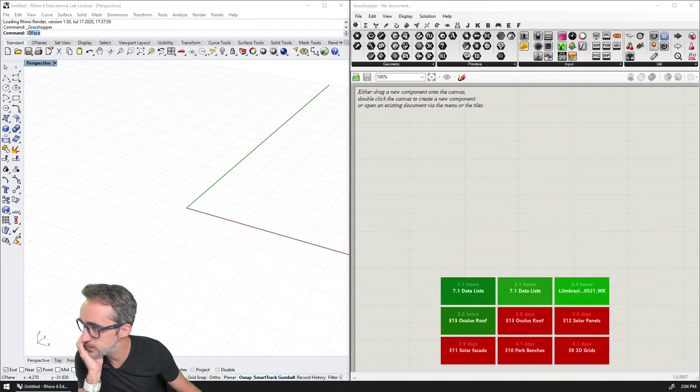Okay Nylan, yes, thank you sir. So what are we going to do? We're going to do 3 exercises. We're going to do a Vierendeel - that's correct, right? Okay, so we are going to... there you go, Vierendeel beam.

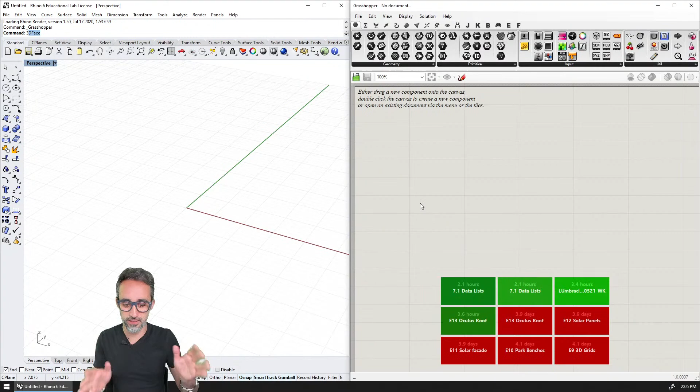And the way we are going to do that - images, tools, usage rights, Creative Commons. Vierendeel, Vierendeel truss.

All right, so we're going to do the following. We are going to - sorry, you should not be seeing this - we're going to do a Vierendeel truss. We're going to do a Pratt truss, right? No? A Pratt truss.

We're going to do something like that, and we're going to do images, tools, usage rights. We're going to do a Pratt truss, something like that. For example, yes, we're going to do one of these, and then what else are we going to do?

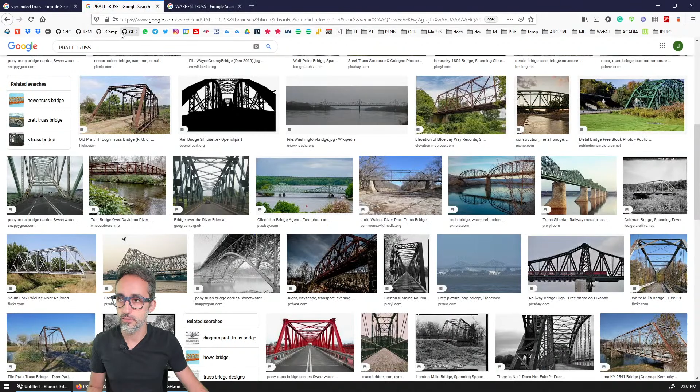All right, so Pratt and Vierendeel. These are going to be very useful exercises because they involve data manipulation and having a set of lists, a set of points, moving them around, removing some, adding others. So it's actually a pretty good exercise.

And then after that we're going to do a Warren truss, and then after that some kind of triangulated facade, and then a triangulated surface - that's going to be quite something actually. So those are going to be the list exercises.

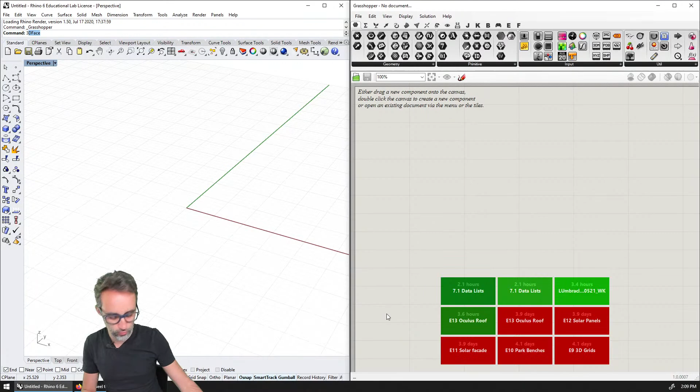Okay, so let's start. We're going to do a Vierendeel truss. So how am I going to start? I will start with the introduction, which I'll record by the end. Then that's going to be me showing 2 points and how the Vierendeel truss goes between them.

I'm not going to explain there, but I'll explain here when I start with the sketches, and how we want to do that - the fact that instead of calculating a long line, we're going to use small segments. So we're going to imagine we are structural engineers and that the model we're generating is for some kind of structural analysis software. That's going to be important to do.

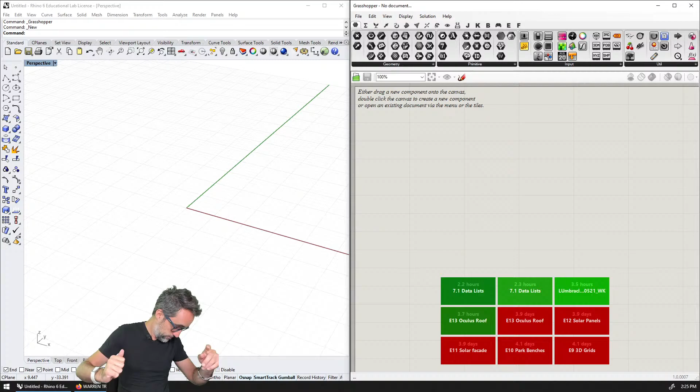Actually, if you allow me, I'm going to take a 30-second bio break, because I've been sitting here since 9 a.m., so I need to go to the restroom. I'll be right back, thank you. Hold on one minute, huh?

All right, I'm back. Rolando, analytical models. Yes, exactly. Okie dokie. So let's get started.

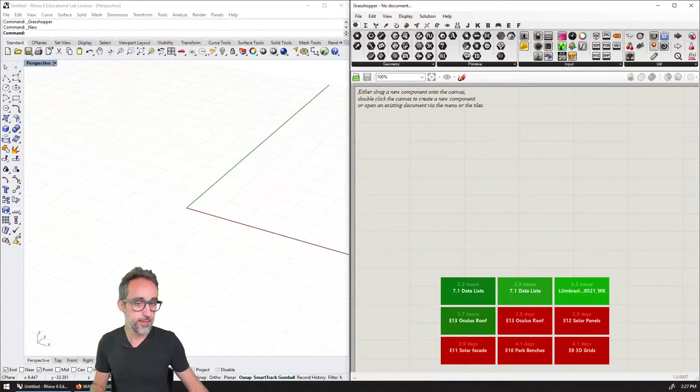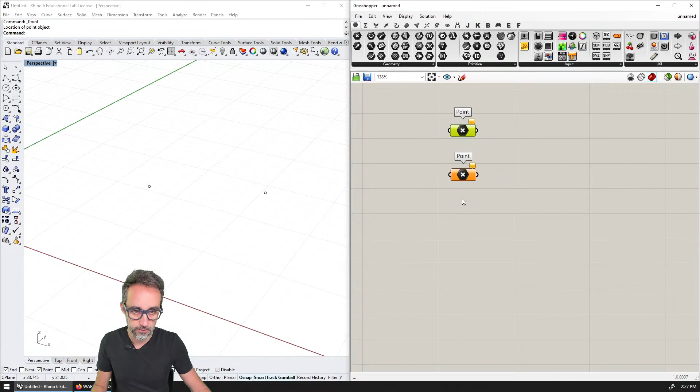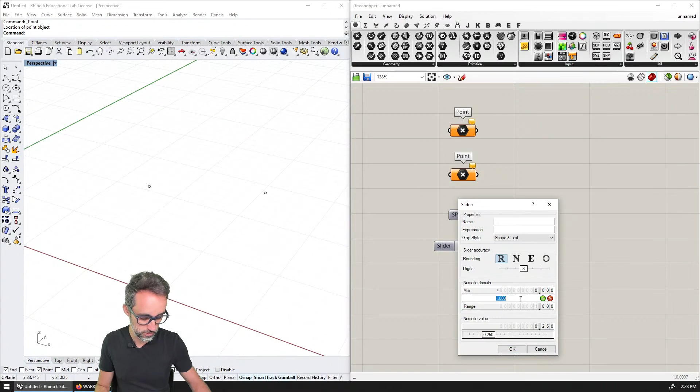Okay, so I'm going to copy and paste this too. And then I'm going to say the length. And number of spans is going to be number of spans. And then this number slider is going to be the factor. So that's going to be, for example, 20. And we're going to set it at 12. And we probably don't need that many. Depth factor. Okay. So there's going to be a long slider, and yes. So that's going to be it. And I'm going to copy this.

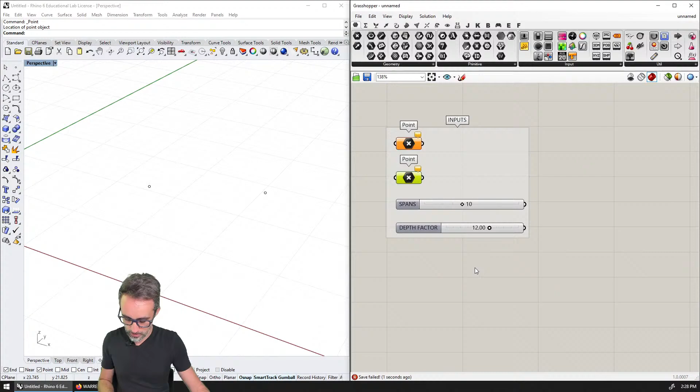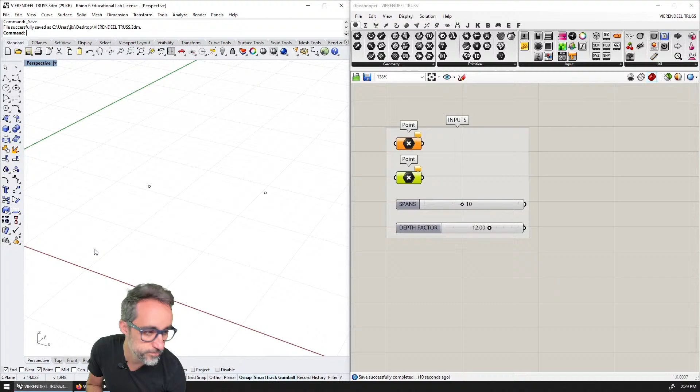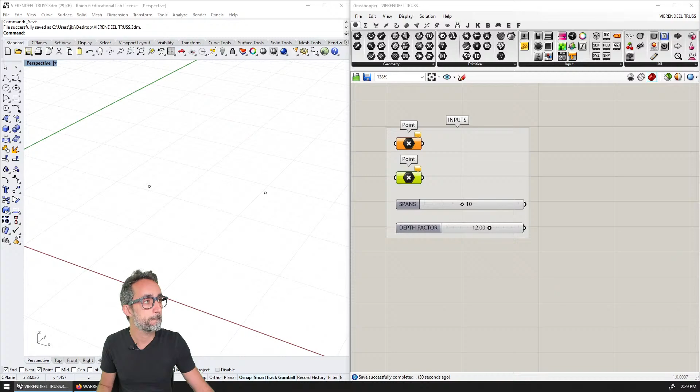Inputs. Okay, so I think we can probably start. And then, what am I going to save this as? Vierendeel. Oh my god, I am super clumsy today. Vierendeel truss, and then here I'm also going to save this as Vierendeel truss. Okay. All right. And what else do I need to do? I think we should be good with this, right? Okay, so let's start then.

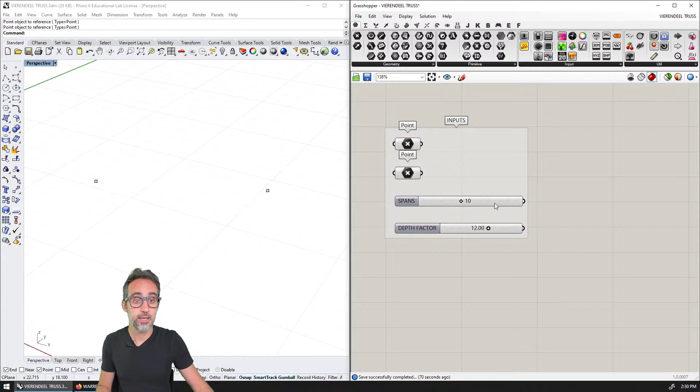So I've taken the liberty of creating 2 points here in Rhino that I will use as supports for my truss. And then I have created some empty boxes here that I'm going to load with 1 point here, and another point here. And then I have 2 sliders. One is an integer for the number of spans for the truss. And another one is going to be the depth factor.

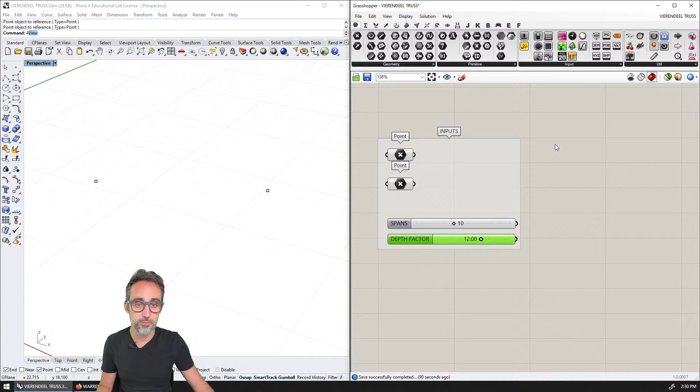Remember, we're going to divide the length of the beam by some factor. And that is what's going to be the parameter. And that factor will give us the depth of the beam. So then the first few steps are going to be super easy. And also, naming the inputs, even if they are empty boxes, is typically a very nice thing to do.

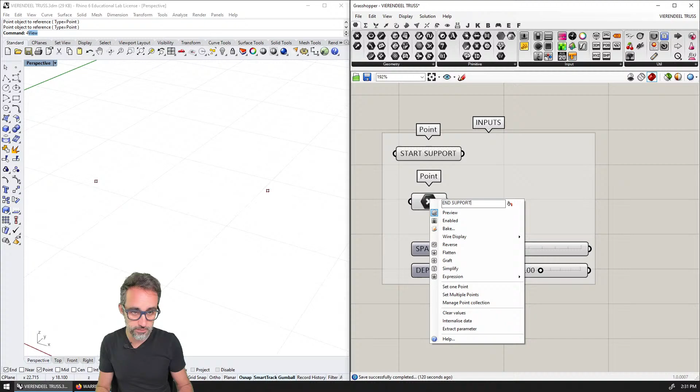So you can right click on a parameter box and then just rewrite here, for example, start support. And then if you click on the paint bucket, this parameter will get that name that you have given it. And here, the same, end support. And if I hit the paint bucket, now they have their names. And I'm going to dock them to the right-hand side because you know that I like things aligned and well ordered.

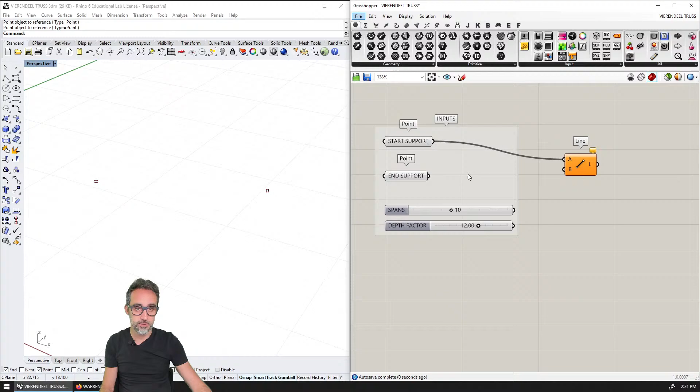So the first thing that I would like to do is, as per our diagram, create a line between the 2 supports, divide it in points, move those points down, and then create the vertical bars. We're going to do that very fast because we already know how to do these things. So I'm going to double click and create a line between 2 points, the start support and the end support. And then I'm going to take that line and subdivide it in an equal amount of length segments.

So this is going to be the curve, and then spans is going to be this number. So for example, if I go down to 2 spans, I have 3 points. So that is correct. Okay. And K is split segments, and I don't need to care about that. And then the last thing is I will need to take all those points and move them down in Z a control distance. How much? That is going to be the depth of the beam.

But the depth of the beam, I need to find that in relation to the length between the supports, which is the span, and the factor that I have set. So I'm going to go to curves analysis to measure the length of a curve. I'm going to place that here, and place a panel, and you're going to see that the panel tells me that this is 8.4 units long, whatever that is.

I'm going to divide that using division. I'm going to divide that by the factor, and that will give me a number, for example 0.70. Okay, and then after that I can move all those points down in the Z direction a control amount. How much?

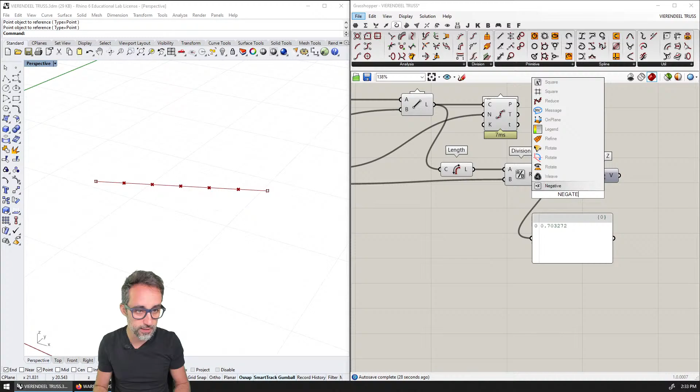That depth that I have just calculated here. So I'm going to create a unit z vector that I'm going to multiply by minus, oops, so I'm going to negate, I'm going to make this number negative. You see, I should have used an expression component here right now. Let me just use it, why not?

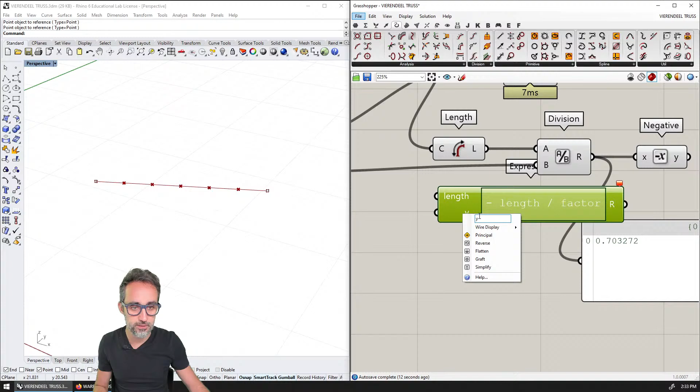So this should be minus length divided by the factor, and then this should be length, and this should be the factor. And then I have length here, I have factor here, and I think we are good now, no? Length invalid, expected parentheses instead of, I think this is just

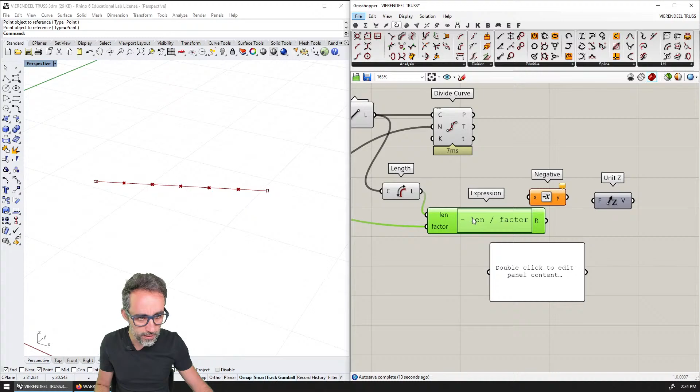wait, so let me just change the name. Sometimes length is a protected name for expression, so maybe length was a function. Yes, so there was a function called length. Returns the magnitude of a vector or the number of characters in a string. So it looks like length was the name of a function, so I was using it as a variable and it was getting confused.

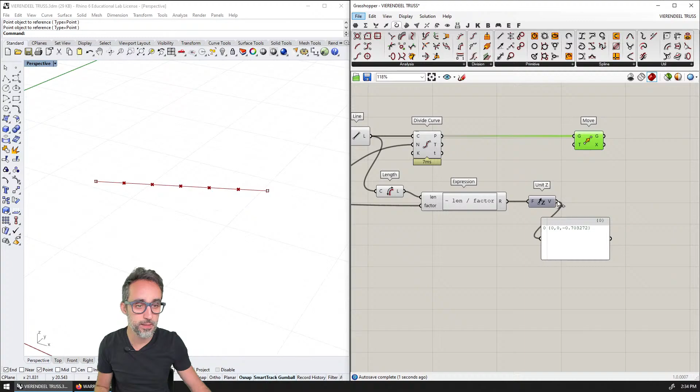So this is going to be now minus blah blah blah, which if I multiply by a unit z vector, gives me a vector in the z direction that is pointing down. So if I now move all these points a controlled amount down, you see, and I'm going to do something like a factor of 6, so that it's a little squarish in a way. And this way, if I move the point farther away, the depth adjusts proportionally, which is kind of nice, and it's a very good thing in the logic of structural design.

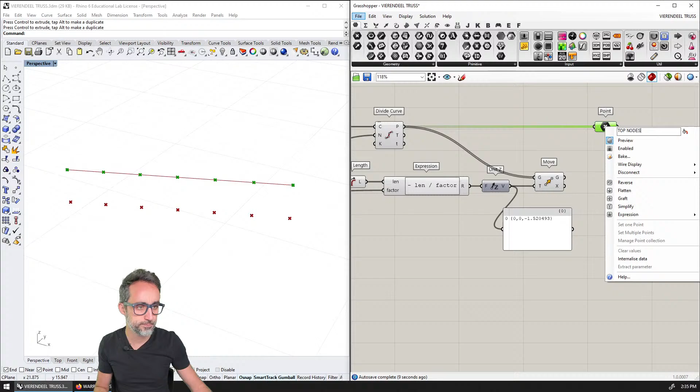So I have this, and then I'm going to do something that will be very useful very soon. I have my points, the nodes on the top chords, here. Just to make sure that I know where things are very clearly, I'm going to add another empty point parameter. This is something that I like doing a lot as well. I'm going to pass these points here, and rename this top nodes. And then I'm going to copy and paste this, and rename this bottom nodes.

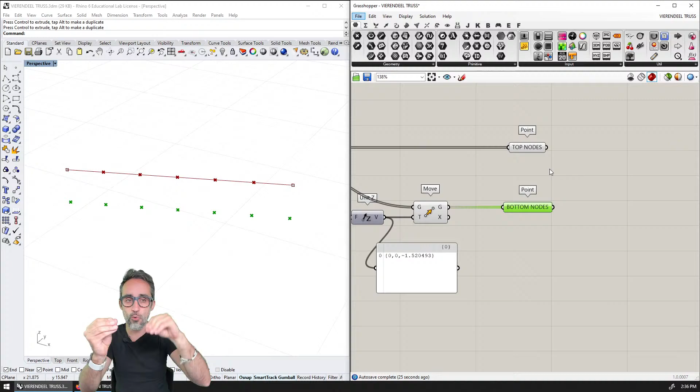These boxes, when you pass data through them, don't really do anything to the data, but it's a really good practice to label things so that we know this is important data, I want to put a name on it, and so that when my definitions grow really large, I know where things are and I can point to them really easily. So this is a really good practice.

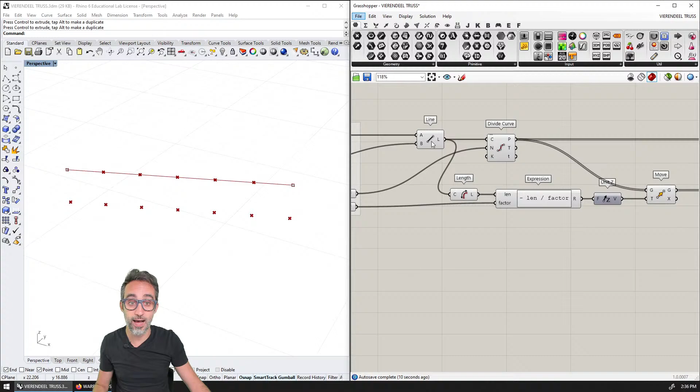And just for the sake of clarity, let me plug in here a panel, and here another panel just to see what is going on. So I have those and I have those. Okie dokie. So I have now the nodes on top of my curve. I'm going to hide this line as well. And the first thing I'm going to do is draw the vertical bars. Vertical bars are going to be super easy because it's just joining the family of points from the top nodes with the bottom nodes.

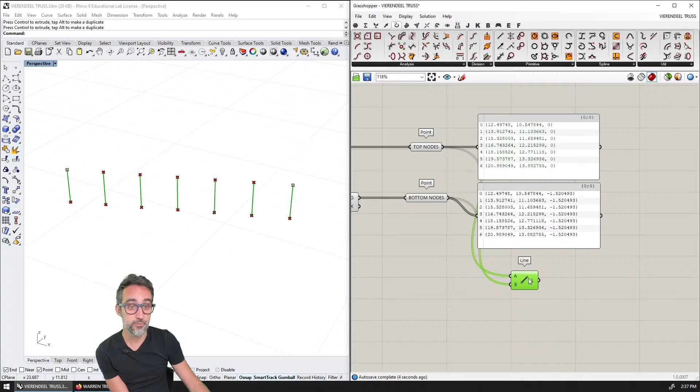And you can see that now I get 7 lines, which are all the points on top with all the points in the bottom. And I would like to remind all of us that this is happening because the line component is doing what's called a matching operation, because it has two inputs and each one of them is a list. It's taking the first point of this list with the first point of the second list, the second point with the second point, the third point with the third point, etc. And that is each one of the lines that the component is generating.

So if we give it two lists with 7 elements each, it will create lines between each pair of ordered points from those lists. And that is very important to highlight because it will become very important very soon when we start trying to design the chords of our truss. Shall we take a look at how to do that?

Okay. And so what we're going to do is, how am I going to explain this? I'm going to explain that 0, 1, 2, 3, 4, 5, and 6. And what I want to do is I want to create bars that are like this.

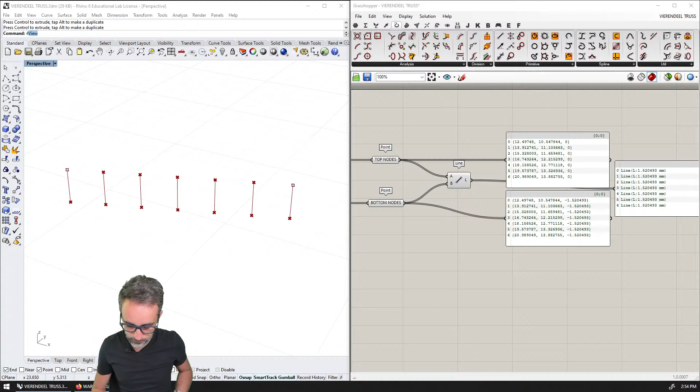Now, I'm going to use the point component to see them. And then am I going to use shift or am I going to use split? I'm going to use split because I think shift is not so much for beginners. I will perhaps use shift in further tutorials down the line. So I'm going to start with split.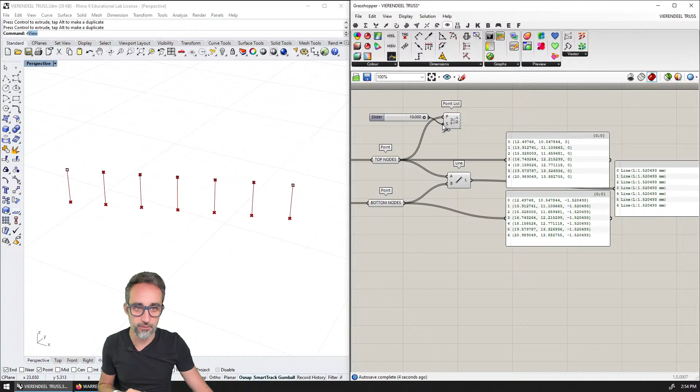For the sake of clarity, I'm going to draw the indices of the points with the point list component, giving it a little bit of a bigger size here. Oh, that's a lot. So to make sure, I'm going to keep this point list visualizer very handy. This is super handy when I'm doing data manipulation. Okay, so I'm going to keep this handy so that I can see.

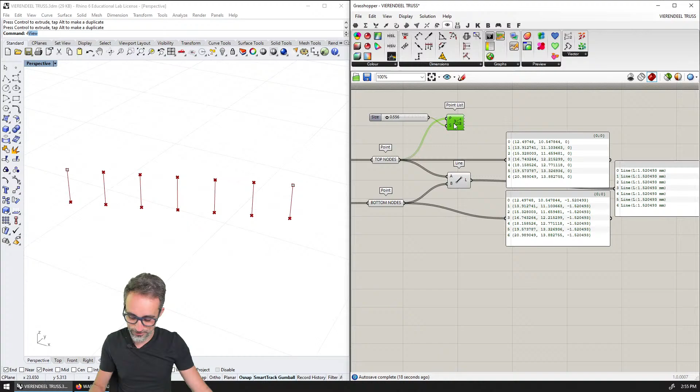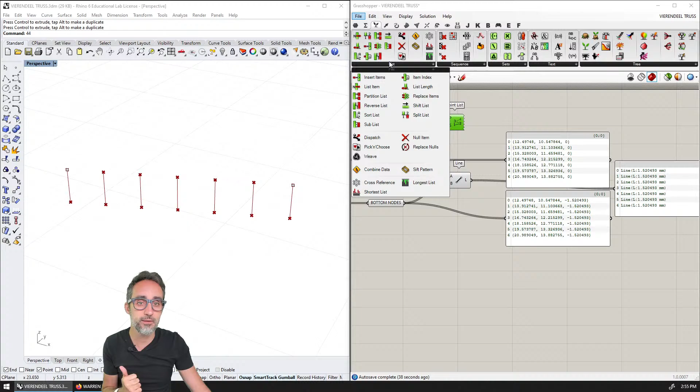And then, first of all, let me turn this off. Let me turn this off. So the first thing I'm going to do is create the first list of points, which is the same nodes on the top without the last element. We have several ways of doing that, but remember that it's going to be under sets and the list category. We could use shift list like I explained before, but that's a little more advanced or perhaps more confusing. So I'm going to start with split list, okay?

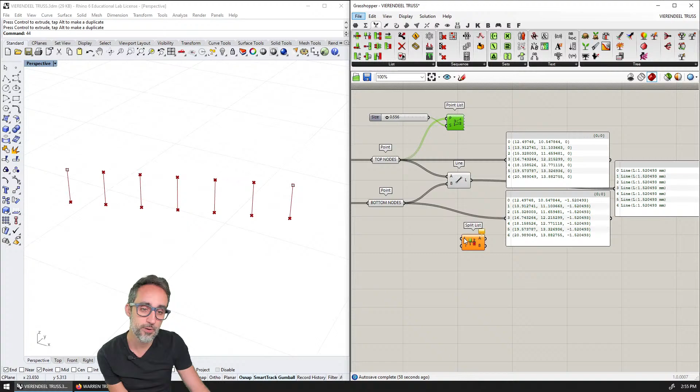And remember that what I need to do is tell the split list component the index where we start cutting out from. What I would like to do is cut out from this one and just keep these ones here. So that's going to be list, and index is going to be whatever. For example, let me start with a slider here. And then I'm going to keep all of these here.

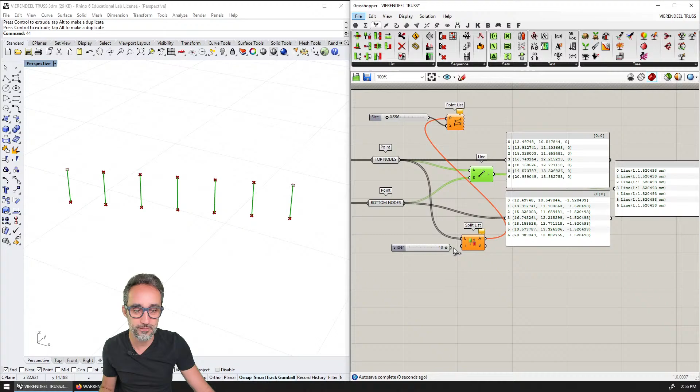Oops, sorry. I'm doing it on the list. Sorry, I need to do it on the top nodes. So I'm going to do that here. And now you can see that if I set 6 as the number that I'm going to be using for the splitting, what's coming out of A is the same list of points without the last one. And what's coming out of B is the last point, which I'm simply not going to use.

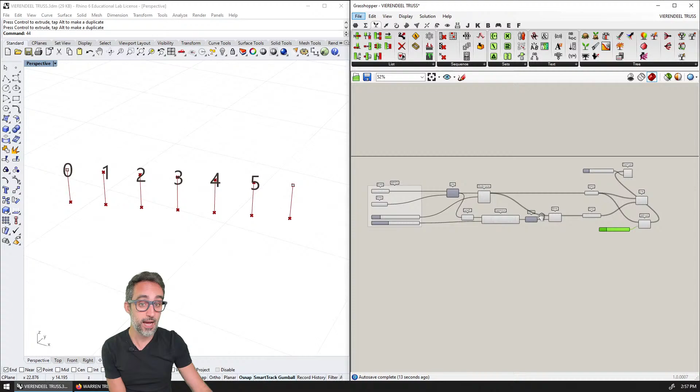Okay? But obviously, this is not great practice. This is just for testing. Because if I now were to increment the amount of spans, you can see that this definition will fail. But it turns out that 6 is the number that I need to start cutting from, which means that to make this parametric, I can say that the number of spans is the number from which I need to start cutting. Therefore, if I ever increase the number of spans, I'm always going to be retrieving everything but the last point. So that's one way to go.

The other way to go is using the list length, okay? To measure how many elements are in the list of top nodes. That will give me the number 7. And then, with a subtraction, I can just subtract the number 2, and that will also give me where I need to cut. Oh, actually, sorry, it's the number 1. Okay, so the list length minus 1. So whatever is easier for you. I think in this case, because we do have the number of spans as a parameter, we can use that directly and save ourselves a little bit of computation. So that's going to be one thing.

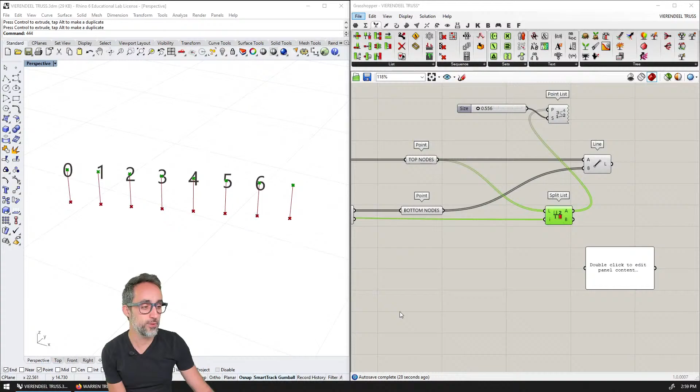Okay, so here, just to make sure that I'm visualizing this, remember I had all the top nodes here, and coming out of A, I have a family of lists which is the same points except for the last one. Now I would also like to create another list, which is going to be all the points, like in here. I want to create a list that has all the points except for the first one. I don't want this one here. So I'm going to use a very similar technique. I'm going to split the list, but hold on one second.

Hi, hello. Come on in. Oh. All right. Can you do this one and this one here? Okay. Thank you.

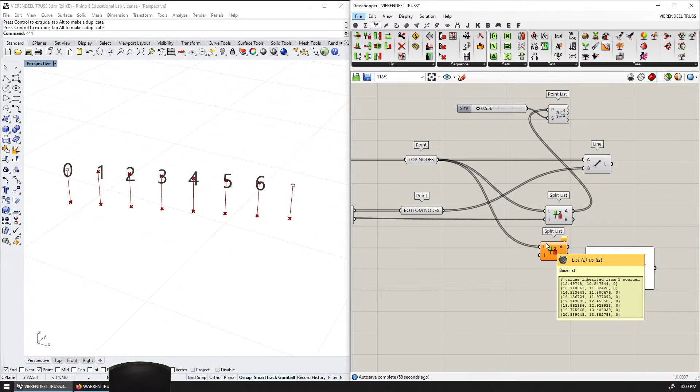All right, oops, sorry. Okay, so where I was here. One second.

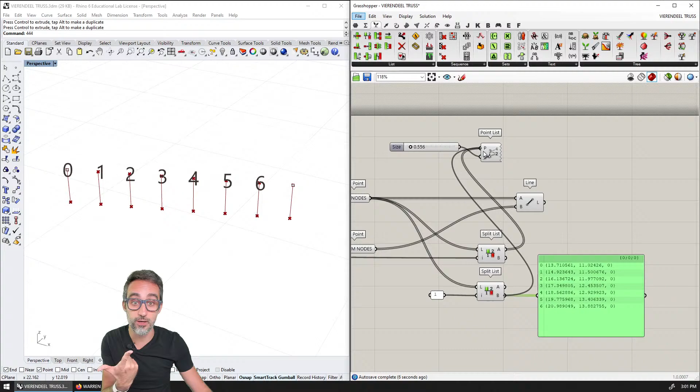So I'm going to split the list, but this time, because I want to remove the first one, what I'm going to set here with the panel is number 0 as the index that I'm chopping by. Actually, no, it should be number 1. So number 1 makes the first element go on its own list, and then it gives me a second list, which is all the elements except for the first one. I can see that clearly if I plug it in here. You can see how I have a new family of points, which is all the points except for the first one.

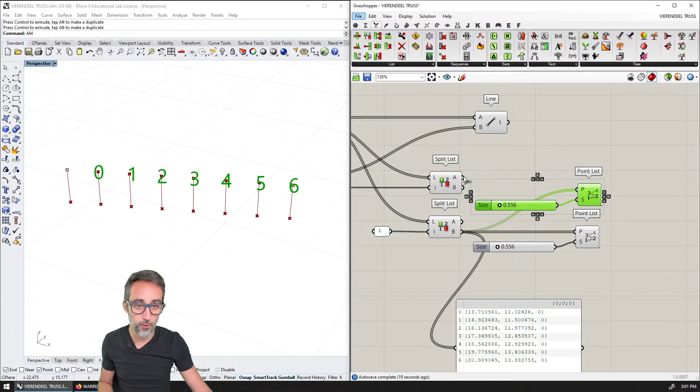So let's make sure we can visualize this well. I have these points, all the points except for the first one. And here I have all the points except for the last one. It's a little overlapped, but you can kind of see where they are. So it looks a little bit like this.

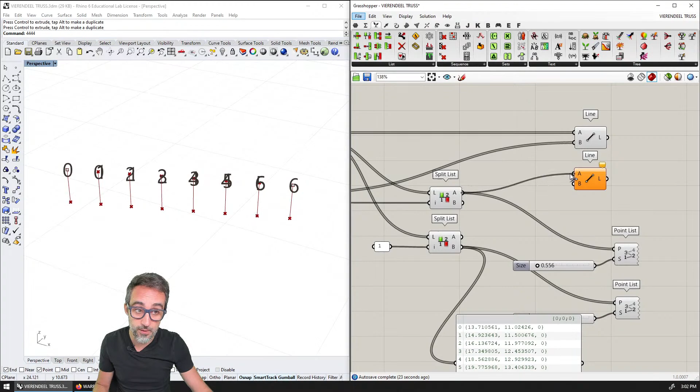The only thing I need to do now is join them with a line component. So I'm going to use line between 2 points, between the first family, which is all the points except for the last one, and the second list, which is all the points except for the first one.

What's interesting is that visually in Rhino, they look like a straight line, which is normal. However, internally, they are a collection of 6 lines, all with the same length. Does this make sense? Yes, because I had 7 points. 6 spans will now give me 6 lines, which also makes sense.

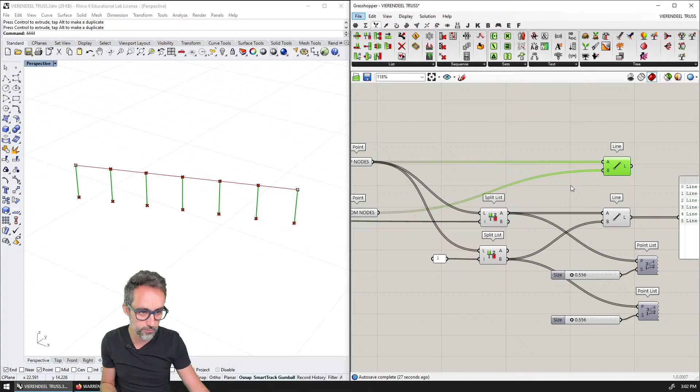All right, so that was great. That's what we needed for the top chords. Now for the bottom ones, it's literally just going to be copy-pasting because the logic is the exact same. So before I do that, I'm going to make sure I label this as the vertical bars, and then I am going to group this.

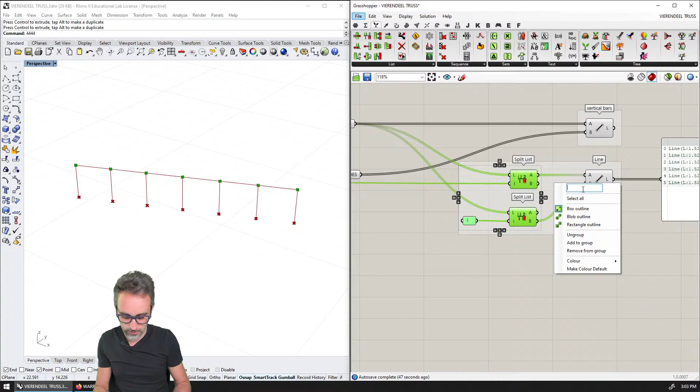And then I'm going to make sure these are the top chords, and then I'm going to copy and paste this, but instead of using the top nodes, I'm going to use the bottom nodes, and plug those in here and here. Kaboom, now I have the same thing. I have a list of lines that are the bottom chords. So, ta-da! I think that's it.

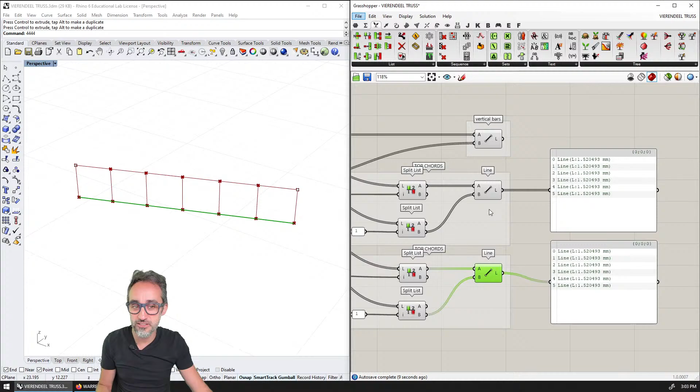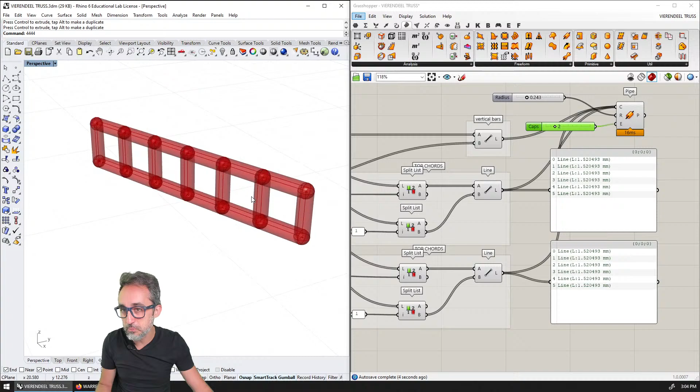Just for visual flavor, I could do something like putting a pipe around them. Just be careful, because pipes are fairly expensive to render in Rhino. So they can look something like this. I can make the radius a little smaller, and make the ends rounded by plugging in the number 2, for example. This can make it look more like a beam, or not—I don't really know, but this is just for visual flavor. In reality, I don't really need that.

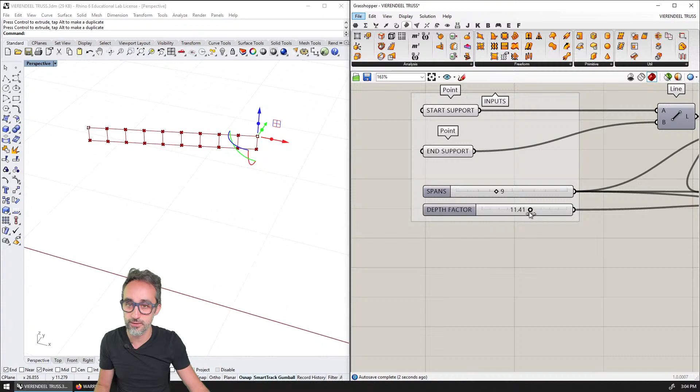So yeah, that was creating a Vierendeel truss. And of course, as I move these points around, the Vierendeel truss adapts. If I do fewer spans, more spans, or adjust the depth factor, everything adapts correspondingly. So this is cool, I think. Okay, all right.

So this was a simple exercise creating a Vierendeel truss. It was a good example of how to do simple list manipulation so that we do controlled data matching. Now I think with this, I'd like to move on to more elaborate examples, like other kinds of trusses, such as the Warren truss, the Pratt truss, etc., to further show examples of how we can do data matching and data operations. Follow me on that in the next videos coming up in this series.

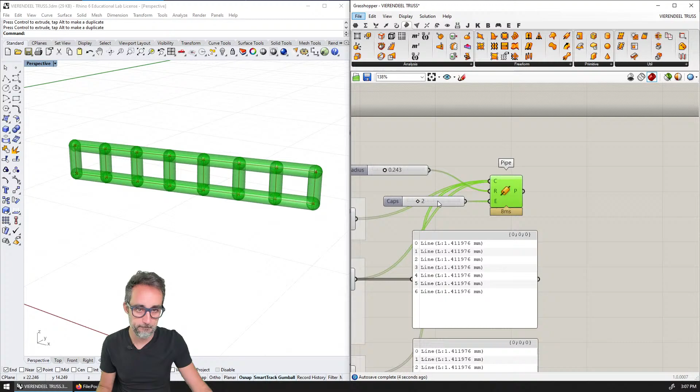Something like that, perhaps. Okay. I don't need to show this. Okay, well, maybe I do. I don't know.

Hi, this is Jose Luis, welcome to a new video in this series, Introduction to Parametric Modeling. In this next series of hands-on exercises, I'd like to model a set of spatial trusses, because these are really good examples of data matching and data manipulation at the list level. The first one I'd like to do is a Vierendeel truss, which looks something like this. Vierendeel trusses are actually a very popular model for certain infrastructures, bridges, and even some building structures, because they don't have diagonals and rely on the joints being rigid elements.

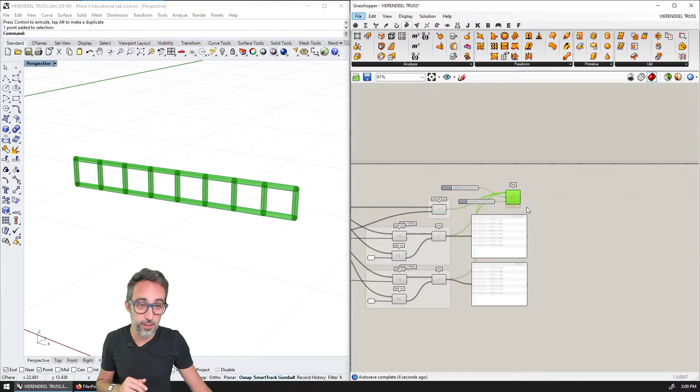We don't really care about that here, but I'd like to make an exercise where we model two supports and then create a Vierendeel truss that spans between them with a controlled amount of spans and a controlled depth factor. Even though we're going to model a surface to give it some visual entity, what we'll actually care about is the diagram of the lines that join the two span supports, because we're going to imagine we're structural engineers and need the structural model to send to some software analysis or calculation environment. So we will export this model to...

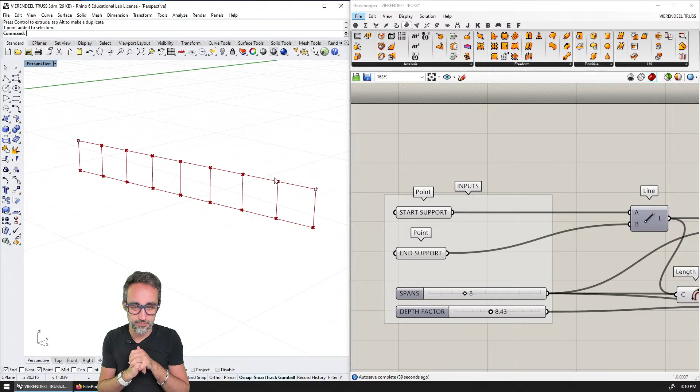Okay. All right, I'm going to start over again because I did not like that. So, okay, I'm going to start over again.

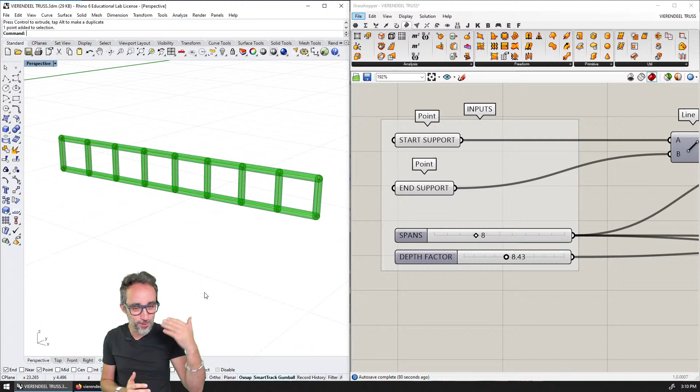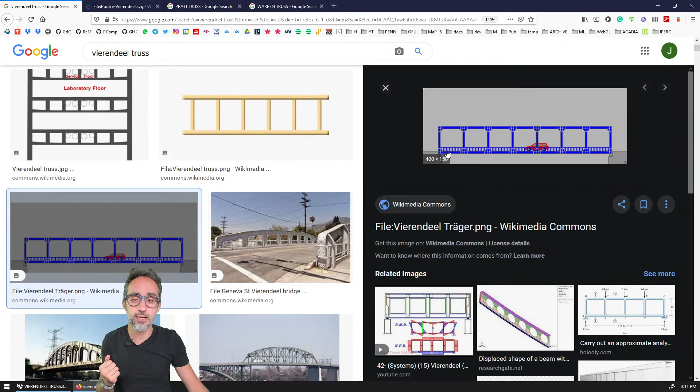Hi, this is Jose Luis, welcome to a new video in this series, Introduction to Parametric Modeling. In the next few videos, I'd like to do some hands-on exercises to practice data manipulation and data matching. For that, I thought doing some spatial trusses would be a good exercise. So we're going to start with the simplest one I can think of, which is a Vierendeel truss, which looks something like this. Vierendeel trusses are very common structures for certain kinds of bridges and building structures, because since they rely on the joints being rigid joints, not allowing any rotation, they can get away without having diagonals.

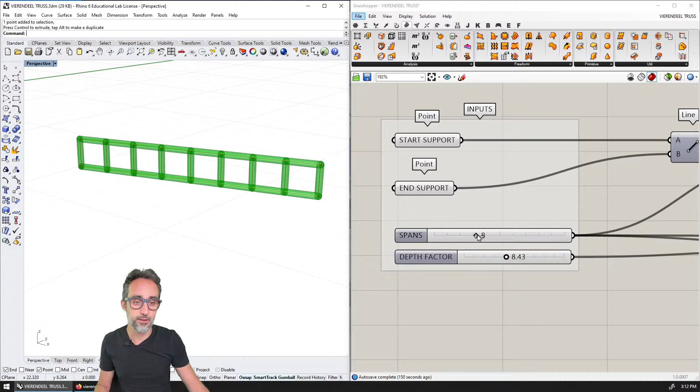Which for many people is a really nice aesthetic thing, and you can also pass things through, etc., even though it makes the elements typically a bit bulkier. But here for us, that doesn't really matter. What matters is that we'll be interested in creating a parametric model that, given two supports - one point on each end - can create a parametric Vierendeel truss beam between them. And of course, we're going to control the amount of spans, the depth factor, etc.

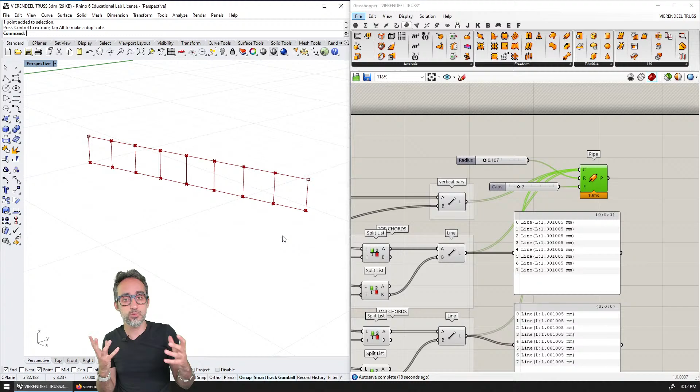And even though we'll have this pipe surface around them, what we'll actually be interested in is the wireframe diagram representation of this beam. Because we're going to imagine that we're structural engineers for this work, designing parametric structures that will need to go to some structural analysis software, finite element analysis, whatever. So we're actually only interested at this point in the wireframes, but with certain conditions that I will explain very soon. So without further ado, let's do the first type of trusses, which is going to be the Vierendeel truss.

Something that I forgot to add to the previous video was baking all of this stuff, and then showing it as how they are individual lines. I want to do that.

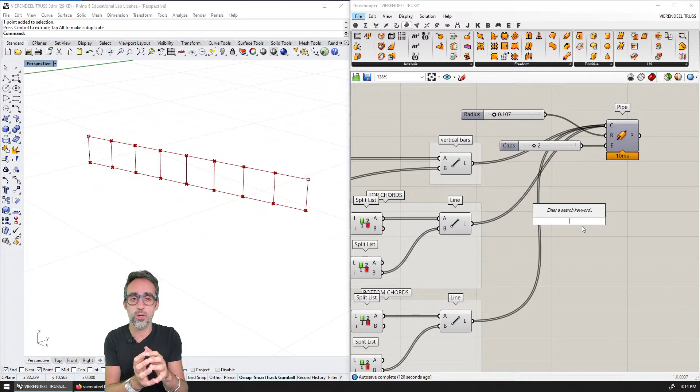Sorry, and I forgot to add to the previous video - I actually want to bake these lines to show you how things work out. So typically something I like doing is that when I finish a complex definition, I like to set up some boxes, some empty parameter components, with the actual target or output or goal of my definition.

So for this, I'm going to create an empty parameter box for lines, and I'm going to plug in here the vertical bars, the top bars, and the bottom bars. So I'll end up with a component that contains all the information I was trying to generate with this definition. And then this will be the one I use for baking.

So I'm going to right click here, bake, and click on grouping. Actually, I'm not going to click on grouping anything. So I'm not going to group anything, and I'm going to close Grasshopper.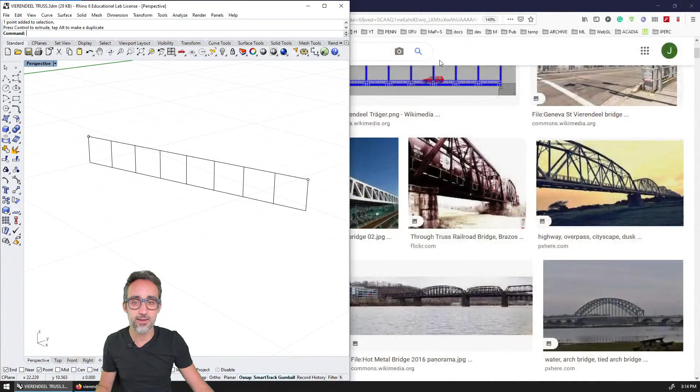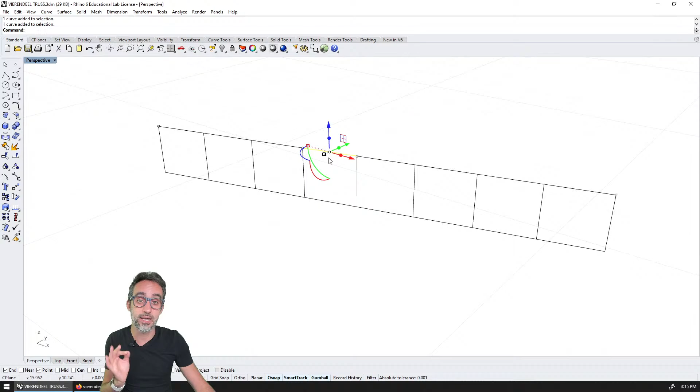And you can see that now what I got was this spatial Vierendeel truss with each one of the vertical bars. But at the same time, you can see how each one of the top chords is individual and goes between nodes. Each one of these is also an individual line segment that joins the nearby nodes. So this is great, this is perfect. It's super clean, and it would be a wonderful wireframe CAD model to send to a structural engineer or a structural calculation software. So yes, this was really good. Good job.

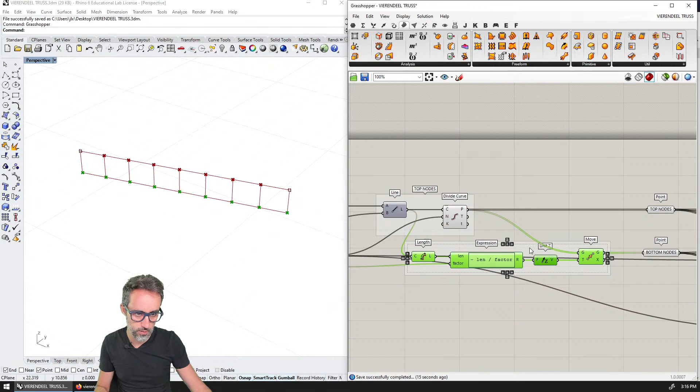All right, and then I'm going to group this here as top nodes. This is going to be bottom nodes. Nope, this is going to be bottom nodes.

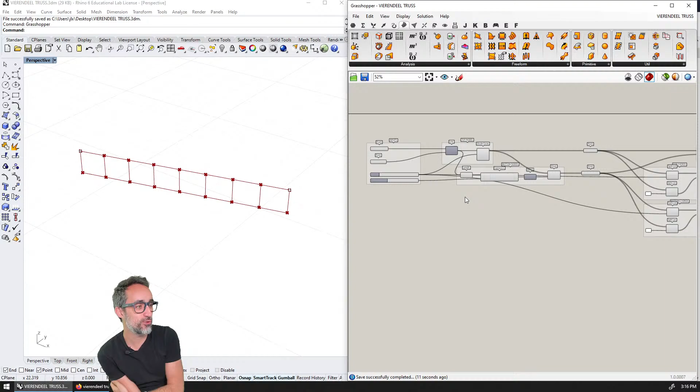I know, honey, I do want to do the shift list method, but I think I'm going to do that in the upcoming exercises, which I probably have to do tomorrow because I need to go. I know I started late, but I also need to go.